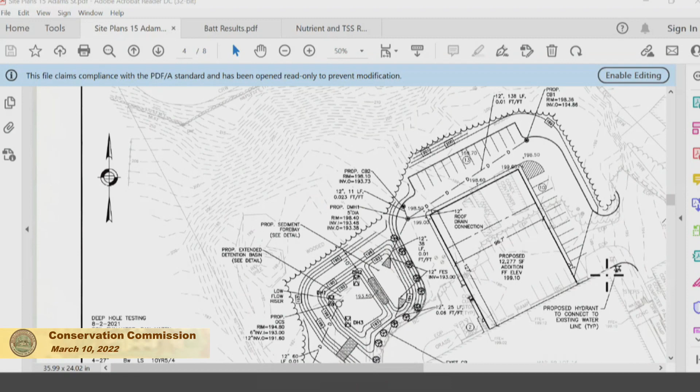Thank you. Okay, so why don't you folks make your introductory presentation on what the project is? And then you might want to comment on what conditions or what changes you had to make as a result of the Board of Health. That might be helpful. Okay?

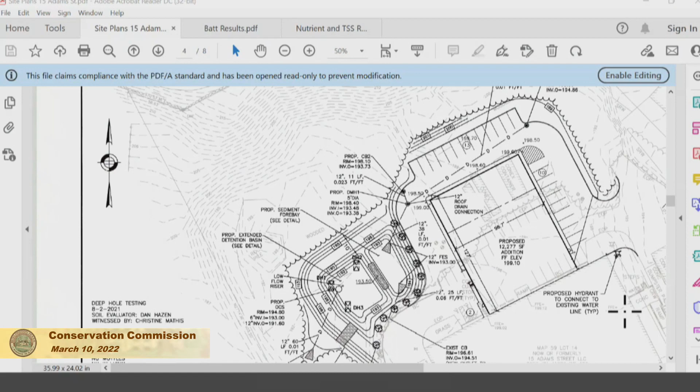All right, my name's Dan Hazen. I'm with Howard Stein Hudson Associates, civil engineers. The building was built in 1963. The site is about six and a half acres. The building itself is 40,000 square feet. Currently, there's 62 parking spaces. The site has water and sewer and utilities to it. Overall, there's approximately 75,000 square feet of impervious area in parking on top of the 40,000 square feet.

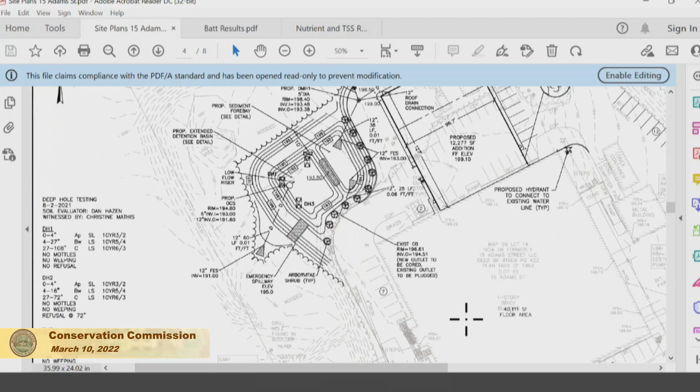Currently, there's no stormwater controls on the site. There are catch basins and curb cuts to direct the water just off the parking area onto the uplands, but due to the age of the site, there's no best management practices in place other than the catch basins. There is a wetland about 250 feet to the south off the property. It's a wooded wetland. There's not much standing water. I believe you did a site walk out there. It probably is some standing water at this time, just due to spring thaw and frozen conditions.

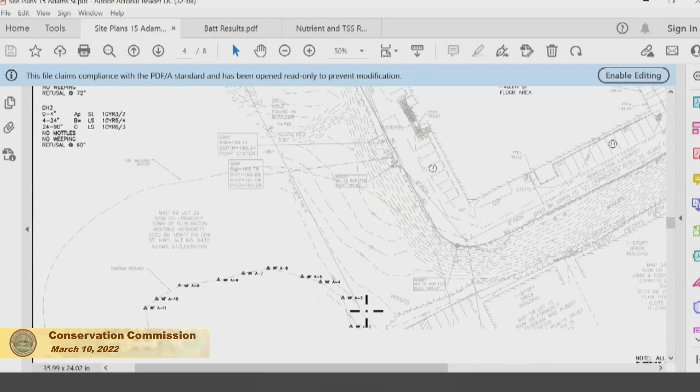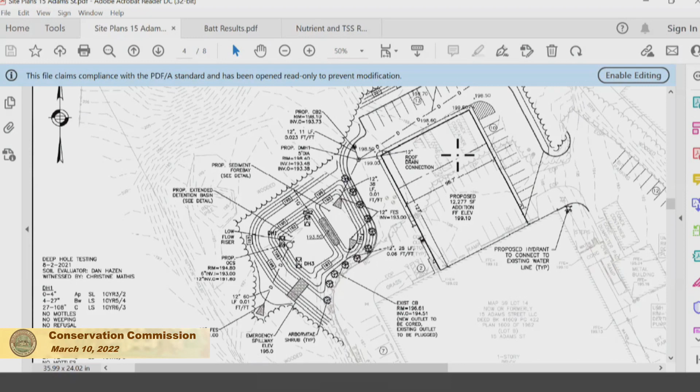We're proposing to construct a 12,277 square foot addition in the back, right there. That will be all warehouse. Currently, there are some Connex boxes on the site to store air filters. That is their primary product. They receive filters and then they ship them out from there. So there's not really any production there. It's more of a distribution situation.

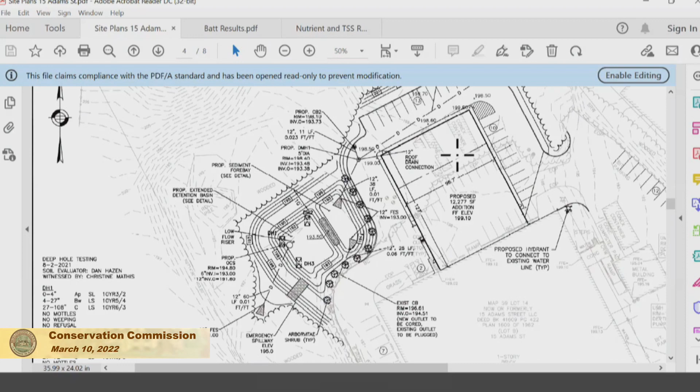Construction will be constructing an additional 1,300 square feet of impervious area. We're here before you tonight because we will be disturbing about 46,000 square feet of area. Of that, 34,500 square feet would be woods, and the other 11,000 square feet would be pavement that we'll be ripping up and then replacing with either building or new pavement.

The soils on the site are fairly gravelly soil. It's a Canton fine sandy loam and urban land mix. We did do soil testing out there through the Board of Health. They did witness it. We did not observe any groundwater. And again, it was a fairly gravelly sandy loam. The closest disturbance to any wetland is about 230 feet, and that would be the edge of the basin.

Stormwater controls that we're looking to install would be deep sump hooded catch basins. Two of those, and we're also going to be incorporating an existing catch basin just to the west of your cursor that just discharges overland. Those 3 catch basins will flow to a sediment forebay, and then from there to an infiltration area on the other side of that filter berm. From there, it would discharge through an outlet control structure for some of the larger storms and flow down to the wetland in the same path that currently the water travels.

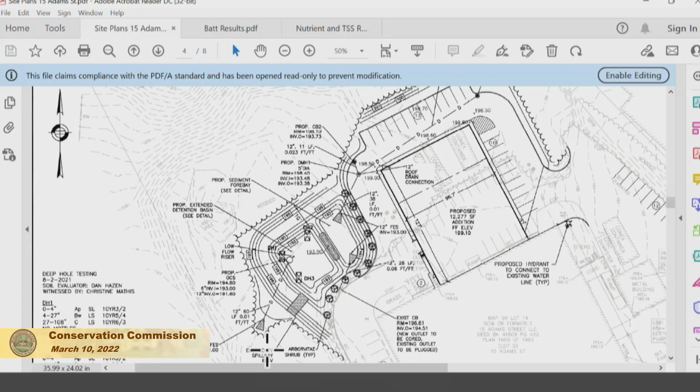So can you maybe go through the numbers that you sent us for the BATT? Oh, for the BATT, yes. BATT - that's the BMP accounting and tracking tool. That was the software that we use.

So basically what we do is we take the square footage of impervious area and upland area, and then determining by the use, input that into the software, and then that calculates how much phosphorus and nitrogen reduction we get through that based on the land use, the impervious area, the upland area.

So as far as, are we confident? Yes. So does the shorter retention time affect that? Because that's a very, very high number, that phosphorus efficiency, 99.8%, which is fantastic if that's right. It's with the new numbers, with the new hours, I mean.

That's the first flush when that rain comes - that's where primarily most of the pollutants come out. And like I said, during most of the storms, to get the 2-year storm we designed for is 3 inches of rain, so that's a fairly significant amount of rain. The 100-year storm, I believe, is up to 9 inches now, using the Cornell method with the extreme rainfall from the global warming that we're receiving, and the more intense storms that we're getting.

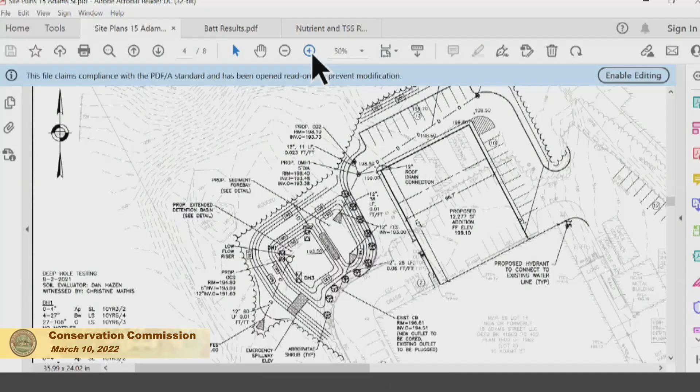So how much above the bottom of the basin is that then, like 5 feet? The bottom of the basin, we're actually building the berm up so the bottom of the basin's almost at grade. I believe it might be only a foot or two down off that, I can't say for certain. But we're not really excavating into the ground, so there's a good 4 feet of material below the bottom of the infiltration basin to the ledge.

Then it'll hit ledge, do you know where it'll go when it hits the bedrock? Not knowing where the bedrock is, we're assuming it's going to be at the same depth. This area, I believe, was excavated at one point because there wasn't a lot of topsoil. Didn't they take out all the topsoil because of the contamination?

Is that what I heard them saying in the Board of Health? I believe so. Of course, without knowing the contours of the bedrock, you can't really say definitively where the water's gonna go if it gets down that far. It's either gonna spread out or follow the slope of the bedrock, right?

Correct. And there's a number of large boulders out there as well, so we're not certain that it's ledge. I don't know if you noticed that when you did your site visit, but there's a number of large boulders. It may not be ledge either, is what you're saying. That's the point I'm making. There's a massive, just underneath where it says proposed extended detention basin, a large pile of boulders in that area.

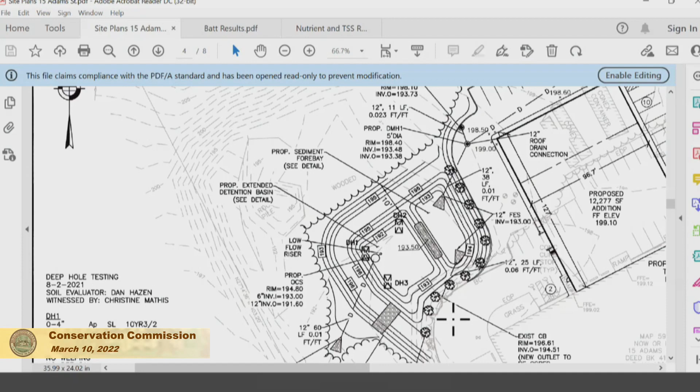Okay, just one editorial comment. The original design was an infiltration basin designed to drain within 72 hours, much less than the life cycle of any mosquito species we have here. Well, it was actually going to drain in 28 hours. Right, so the original design would not have been any sort of public health threat at all with regards to mosquitoes. Okay, just a comment. Can I make another editorial thing too?

Just on your nutrient, on the phosphorus removal treatment train, I don't think you can count the deep sump catch basins before the infiltration basin, because for the EPA curves, you're only supposed to count one thing, based on just the infiltration basin. The deep sump only gave us about 2%, so rather than being 98%, it would have been up to 100. It's a small number, but we can update that when I send you the actual backup information.

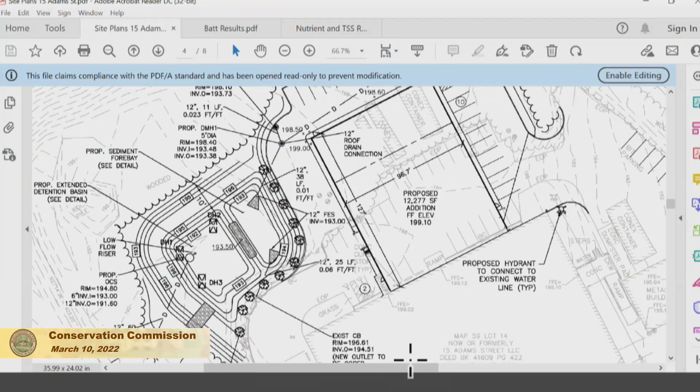Okay, anything else, Sean? Thank you. All right, so let's start with Gail. Gail, you have any comments? Yeah, I have a few questions from looking over the plan, let me organize myself here. Some of these were answered already, so hopefully my notes are clear from what I've read.

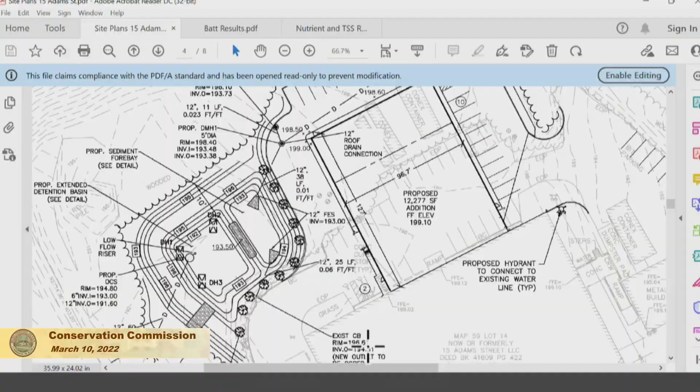Could you explain 1S and 2S? You talked about 1S flowing to the wetland, right? Let me grab this report. What's this from, Gail? This was in the description, it had to do with the catch basins, identified as 1S and 2S. Those are the subcatchments that the HydroCAD report produces.

So you talked about 1S going to the wetlands at Adams Street, right? The outflow, correct. 1S is basically the drainage area to the north and west of the site, and 2S is the pavement and existing building that flows down to Adams Street. So 2S goes out to the street? Correct. Basically all the construction is going to occur in 1S. Yes, I understand.

So you're saying all the new construction and disturbance is going to be handled by 1S, none flowing towards 2S? 2S is the portion of the site that is not going to be disturbed by construction, or a very minor amount. I understand, but none of the new construction feeds towards that direction? Correct. That's why we drew the dividing line there.

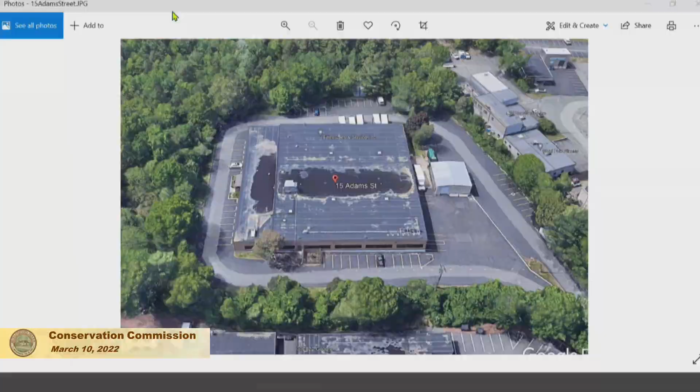Did I hear that you are adding only 1,300 square feet of impervious area? Sorry, I didn't understand. I'm sorry, I said the impervious area, how much are you adding? Is that 1,300 square feet only? 13,000. Or 13,000? Well, it's slightly less than 13,000. The addition itself is 12,277 square feet. But a good portion of the addition plus the existing parking area is on existing parking. So we're putting a building on top of pavement, or we're excavating pavement to put a building in a good portion of it.

And the roof runoff, what are you doing there, can you show me? The roof runoff will be piped to the basin. That was incorporated in the drainage analysis, that the roof runoff would go into the basin to be infiltrated. Directly, right? Correct. Directly? Yes. It's clean. It should be clean water, it wouldn't have a chance to get any contaminants in it. No, I understand that, yes.

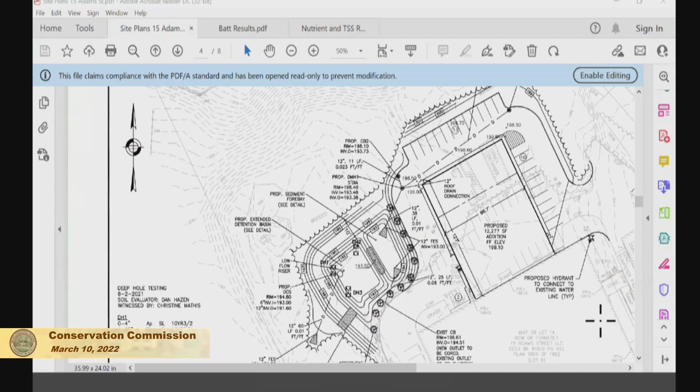And the same thing about the trees, losing trees is also my concern. And if you could consider the solar panel, what Gail was mentioning, that would be really good. I think this is a much better place or opportunity to place the solar panel. So I would tell you to consider that. Okay.

Ed? After listening to all my other commissioners, I can't see anything else I have in question, so I'm fine. Thank you, Ed. How about Bill? Couple of items.

In terms of the tree cutting, I'm not going to duplicate what everybody else has said, but you did mention that your basin is somewhat oversized for the calculations that you had done. It's designed for the 100-year storm. The reason I'm mentioning that is that one of the factors that is never really calculated into stormwater plans is how much water those trees are currently taking out of the ground and will not be doing in the future. So that'll be an additional load to the stormwater treatment when those trees are not there. So if it's oversized, that would allow some room for error from the lack of trees in the future. Correct.

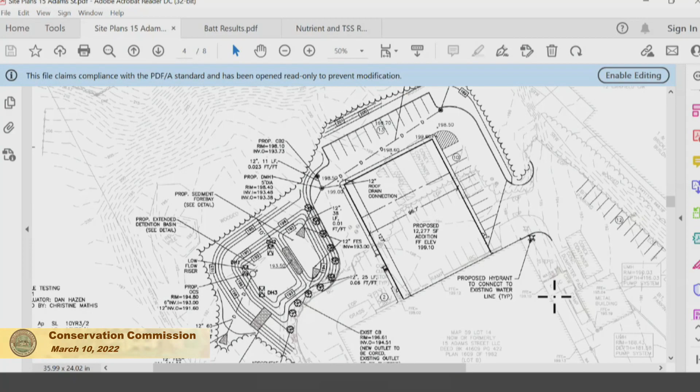The existing catch basin shown in the plan there, that is being replaced? Yes, that is being replaced with a deep sump and a hood to get the TSS removal. The existing building's roof runoff, I'm assuming that just flows onto the pavement somewhere? I'm wondering, is any of it likely to be captured in this new improvement on the existing catch basin? Do you know where it comes off the building? No. Okay, I'm just curious, because if that was the case, some of that might end up in the treatment there as well. Okay, that's all I have, thank you.

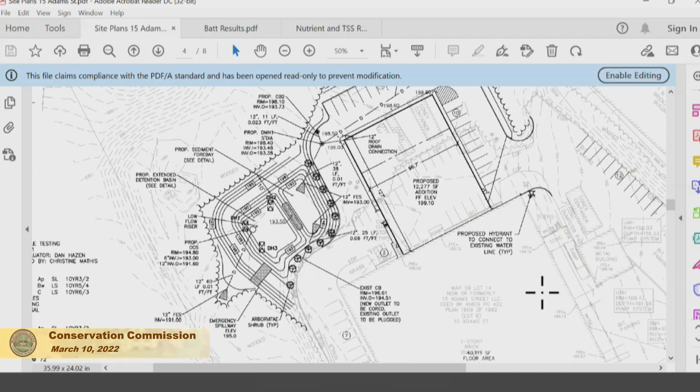Okay, I guess I'm last. I have a couple of things. Could you explain the forebay? I understood what you said about infiltrating the first half inch and so forth. So if there is a rush of water, the forebay is going to have the pollutants in the bottom. Is it going to stir them up and then overflow the berm and discharge? Somewhat, maybe? Somewhat, yeah. It's fair to say.

The whole point of the train is that the catch basins take out the sands, the heavy solids and the trash. The forebay would take out the medium size, and then the infiltration basin. And that's kind of the point of making sure that there's regular maintenance. I mean, right, that essentially is the honest answer. If you get a real rush of water, some of it's going to resuspend. Correct. And so, given that answer, the reason why I led with that is because I have a question.

Would the plan be compromised if you took the roof water and sort of spread it out, if you had less water, or you had a way of handling the roof water during a major storm so that when it overflows, you just discharge it to the back? Would that upset the runoff calculations? Because that way you would maintain a lower flow through that forebay basin. Or alternatively, and you don't have to have the answer now. If this is something you could look at, you could say that too.

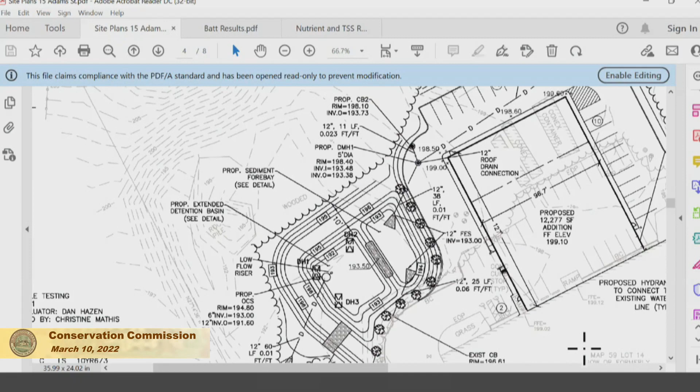But what I'm asking is, would you take the roof runoff from the addition and go not into the forebay, but the after bay? I don't know what it's called. Yeah, I was just about to say that, because it is clean water and essentially it doesn't need that extra treatment in the forebay, and you'd have less risk of resuspending the solids and shoving them out, and I don't think it would cost your client very much to do that. Yeah, I don't see that as a problem. Does that sound, in your judgment, reasonable? I'm not trying to design it for you. No, it definitely sounds reasonable.

Would that affect the phosphorus? The area is already calculated in. Doesn't affect the phosphorus. The rooftop should be fairly clean. No, I'm not saying the rooftop is dirty. I'm saying the calculations. The basin is where the phosphorus reduction is taking place, and if you're flushing more clean water in there, my earlier point of it getting stirred up and overflowing. But isn't the phosphorus in the forebay with the first flush? A good portion of the phosphorus should be in the forebay, but any additional would go into the other basin, but it's still substantially less. It's all under the same storm, the same IDF curve is what I'm getting at.

Is the phosphorus suspended or dissolved typically? It's typically dissolved. So holding it in the forebay is not going to make it go away until it infiltrates. Correct. But there will be infiltration in the forebay. Yes, there will be some there, and then the rest will take place in the other basin. Okay. I think it'd be a better system because where most of the pollutants are, there's less chance of resuspending in a higher storm. Yeah, and it's already calculated for that area. That would be great. So could you two take a look at that? Yeah, we can definitely take a look at that. Okay, thank you.

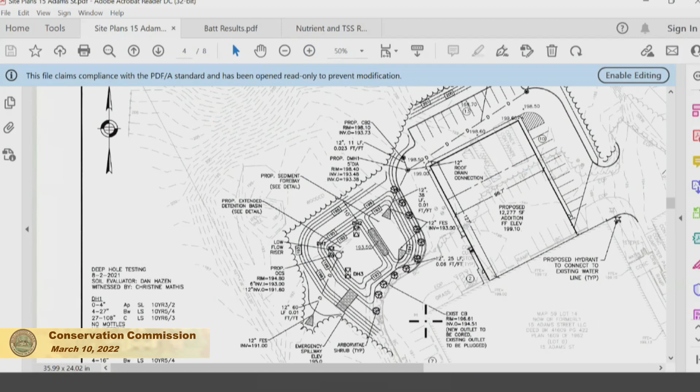So with that as the preface, without too much added cost, the way the contours are, do you see on your plan on the right-hand side, the number 12? I don't know if you can see it up there. I can see it on my plan because I have paper in front of me. Sorry, I'll zoom in. If you want, you can come look at this. Looking, Larry? Yeah, I'm looking right here. Okay.

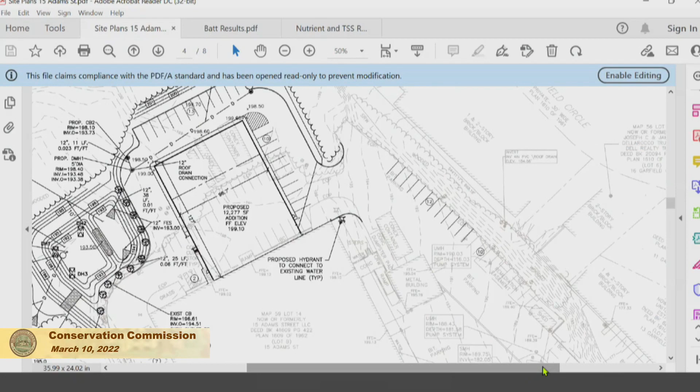The way the contours go, it would perhaps not be terribly expensive to capture some additional stormwater, since it heads right to the edge there anyway. You could possibly put a catch basin and catch some additional stormwater. There'd be additional cost, obviously, because you're not planning to do that, but maybe without an outrageous amount of cost. I was wondering if you could take a look at that, because any additional stormwater sheet flowing off into our stormwater system is not good.

So we're not increasing the existing flow. I know, we're capturing all the additional. Oh, I know that, I understand that. What I'm wondering is if it's possible you could run it by your client and ask them, because it's a contribution to managing stormwater, which is one of the biggest pollution problems in the country now.

It just seems like, and I'm not even suggesting that you're required to do that. I understand. Okay, so the way the contours are going, it seems like you could capture that whole little right side and put a catch basin in there possibly. Now, I don't know if the elevations would support it. That's the other thing.

Well, if we were able to put an infiltration catch basin in there, you're familiar with those, right? Basically it's a self-contained structure that goes down, and it will capture the water and filter it underground. That's a possibility. This is more of an ask. I understand. It would be an additional cost to the project. But if we had to pipe it over, I have a feeling the elevations don't support it.

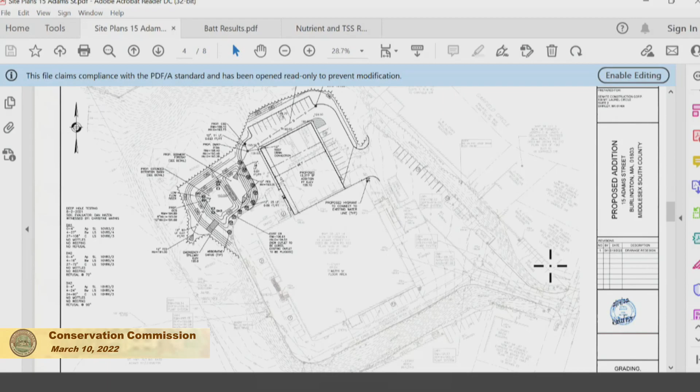And it looks to me like there's a building just to the northeast there, right there. That's below grade, right? That would be below us. Yes. And by infiltrating in that area, this building was built in 1963, so we're talking 60 years ago. You're concerned it might just break out on the slope? Either out of the slope, or I would hate to have them come back and say they're having water issues or mold inside there. I certainly understand. So that's just the first thing.

All I'm asking is, you may have good reasons why it doesn't work, and I get it, but maybe you could just take a quick look and see if it's feasible. Sure. Like Bob said, we could possibly do something like a beehive basin, where it would capture some of the runoff during smaller storms, but they're not sized to handle a larger 10, 25, 50-year storm.

It would be a contribution to what we try to do environmentally here with our stormwater permitting system. Right, it would lighten the load downstream a little bit. If you could take a look at it, it would be very much appreciated, please. Sure.

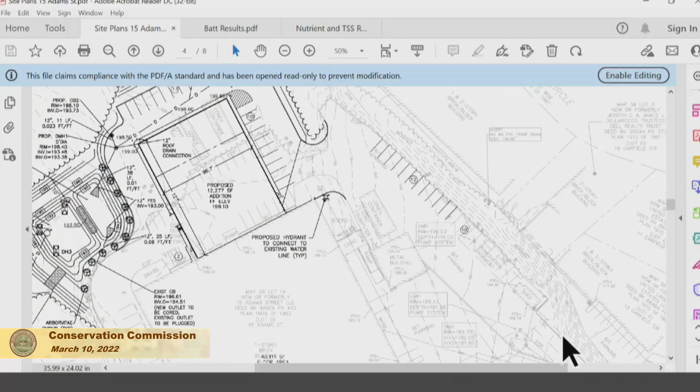Can I ask a related question? On the other side of the property, in the lower left corner of the paved driveway, there's a couple of items in the gray called inverts, right near circle number 7. To the left? Lower left of the building, the driveway that goes around. Yeah, down in there. There's a little triangle of property that says invert.

Is that where water is currently flowing off the pavement? It just goes out there? I believe so. That would already be going down the slope towards the wetland. Correct. And below that on the corner, there's another invert. I think that might be a sewer. Okay, so some of the water on the existing pavement is already going towards the wetland and not flowing out to the street. Correct. All right, good.

Now, I have one more thing, and again, this is an ask, not a requirement of the bylaw at the present time. There's been a lot of talk about trees. Why don't we formalize that it might be useful to consider planting some trees back there and watering them the first year. I don't know if it would be a terribly large expense. Eileen and John, would that be a worthy ask to see if they might be willing to do that?

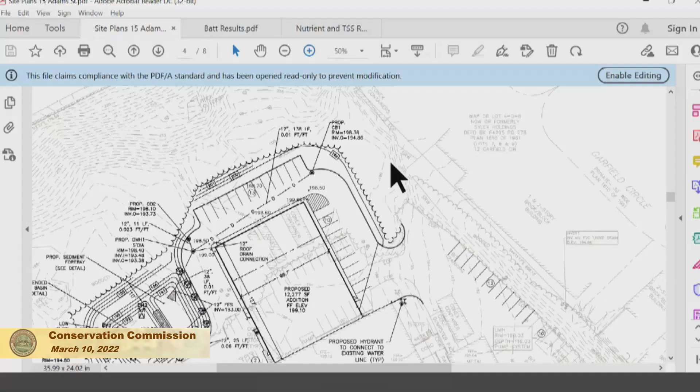Well, so I have one. So you're actually clearing and grading like 30 feet to the north beyond the parking lot? So what's the purpose of that? Why are you clearing and grading? That would just be for snow storage in that area. Because when the plows go in, they can push directly up north and then they can push off to the side. And it's in an upland area that would allow for, I mean, we wouldn't want to destroy any trees that you would plant there, obviously, so it'd have to be far enough back. I mean, if that was the area you were thinking of, that obviously wouldn't work.

So where else could you? I don't know, I was just gonna ask them as just a good faith ask, if they would just take a look at it. Because trees, you're not gonna get a mature oak tree if you plant something, but what are the typical plantings, 1-inch diameter type of thing? Yeah, so those are really sandy soils there, so they would have to be watered very frequently, and you'd want fairly tough, drought resistant, like maybe pitch pine or white oak or something like that. Something that can really handle dry, sandy soils.

I mean, trees have such an environmental benefit for many reasons. I won't have to go in and lecture everybody on that. A lot of people know this now. And it's not required by the bylaw. Right. Okay? Yep. But it's kind of an ask. Okay. See if you might consider it. Could we just see if something makes sense in back there? Okay. Okay.

What are you proposing? I know the Board of Health asked for some screening trees or something. Are you putting arborvitaes or something else there? Is that what that's going to be? Well, frankly, we were going to use some of the boulders because their concern was safety more than anything else. And so we've gotten some feedback from the planning board where they've asked for a guardrail. And we've got a big pile of boulders there; they're going to stop cars from driving over the edge really well. And frankly, it'll be a little more appealing than a guardrail made out of wood, okay? Right. In our opinion. So that was our intent, because we think the arborvitae is going to get trashed just from where they're located. Right. All right, that's all I have.

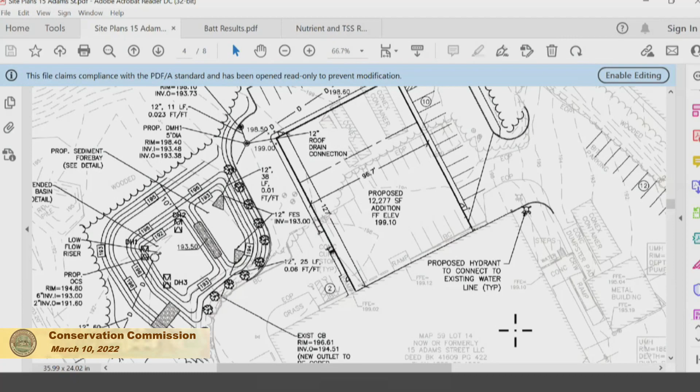So is there anyone in the audience, either online or in-house, that has any questions or comments for the project at 15 Adams Street, Burlington? Okay, the record should show there is no one else participating. So I have a list of 6 things. Could I just quickly run through it to make sure we're all on the same page?

Yes. So we're going to send the parameters to Eileen for computing percent removal for the program. Right, the areas that we put into the software. All right, and you're going to update the percent removals for not counting the deep sump catch basin, which will change a percent or two. Right. Okay, and you're gonna remove the fertilizer and pest control references in the O and M plan, because it's not really needed. And you're gonna take a look at the roof runoff to go into the second bay. I don't know if there's an official name for it. I call it the second bay. Okay.

And you're going to take a look at potentially some type of mini infiltration basin right around the 192 contour, because it just directs the water from that section right at that. Okay, and then the last thing is trees, which we've had more conversation about than anything else. Yes. So two things. One, there's a hand up. Yes. But before you call on the hand, can I just make one request?

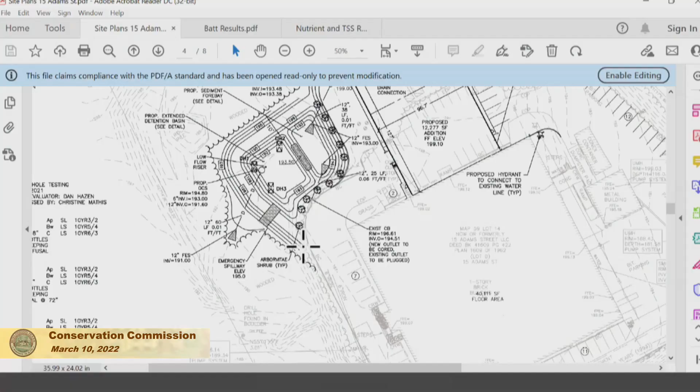What are we doing here? Okay. Oh, he's just looking at the plan. He just wants to delineate the location of the basin. I just want to understand what point he's talking about. So the closest of the grading. So yeah, right around there. Okay, yeah, sure. Thanks. So you want the outside of the grading point? Yeah. Okay, all right. Just the closest work to the wetlands, I think is what you're looking for.

Okay, yep. All right, so I think I saw Brenda Rappaport. She's chair of the planning board, I believe. Brenda, would you like to say a few words, please? Yes, thank you. I just wanted to note, the folks are talking about a guardrail. We weren't necessarily looking for a guardrail. What we're looking for is more trees, more greenage, just for separation, not a guardrail, but just for the record. That's all. Okay. Thank you.

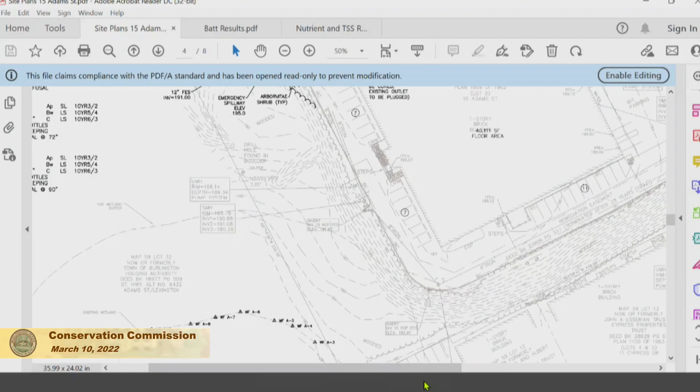Okay, anyone else that's online? It's hard to see the screen, like seeing a hand up, but I'll try. Anyone else who wants to make a comment on this? Okay, so

Eileen, is it reasonable to assume that we might be able to issue the permit at the March 24th meeting? I think it probably is, based on what we've heard. So you have a few things to look at, but I didn't see any major showstoppers here. And we'll get that out for you at that time, after we go through the 6 items that we had on the list. And you have a planning board meeting next week, you said? Yes, we're meeting on the 17th with the planning board. So will we send them some comments about our concerns? Okay, sounds good. I don't need a motion since they're agreeing to it in person. You need a motion, you need to vote to continue. Do we need to vote to continue? Yeah.

Okay, all right. Could I have a motion to continue the hearing for the erosion sedimentation control permit for the project located at 15 Adams Street until the March 24th meeting of the Burlington Conservation Commission? Is there a motion? So moved, Bill. Second? Second, Gail. Dawn, how do you vote? Yes. Gail? Yes. Indra? Yes. Bill? Yes. Ed? Yes. And the chair votes yes, by a vote of 6-0-0. The 15 Adams Street hearing is continued to the March 24th meeting.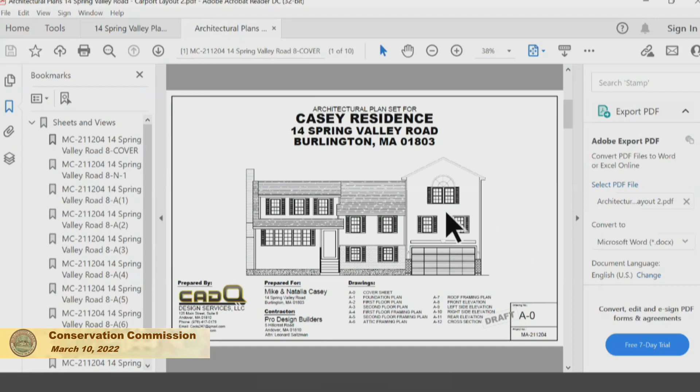Sure. So I don't know if the commission got a chance to look at all the revised drawings and plans. But basically, what you have is a garage addition. There's like two floors above it. So it's not a garage. It's actually a residential addition with garage. Okay. There you go. So the garage level, the addition will be built on piers, essentially 4 piers with open sides on 3 sides. The 4th side is obviously up against the house.

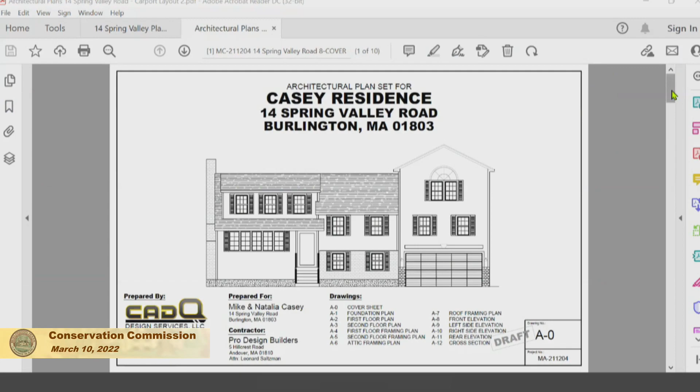So I think it looks okay. It looks like something that might be approvable. I would recommend that the applicant run it by the building department.

I did send a copy of it to the building department and got some reply that I didn't completely understand. So I would suggest that you talk to the inspector of buildings and make sure. Sometimes architects draw something that looks good, but it doesn't always work. So I just want to make sure we don't go through this, close the hearing, approve it, and then find out you need to make something wider or a complete change.

And also, I know you've had some difficulties with DEP, some confusion about the submittals. It'd be good if, within the next couple of weeks before the next hearing hopefully, Merrill -  who you were dealing with - will have a chance.

Once again, we don't want to close the hearing and approve something and then get a comment from DEP that it doesn't meet their standards. How do you get them to kind of pre-approve it that it looks pretty good? Well, I'll try to call her or email her. You'll talk to them? Yeah.

Okay, you've been responsive, but on the second revision - or the first revision - that we sent in, I didn't think to put the DEP number with it. So they've been assuming it's a completely separate project, even separate residence, and didn't attach the two. So we cleared that up.

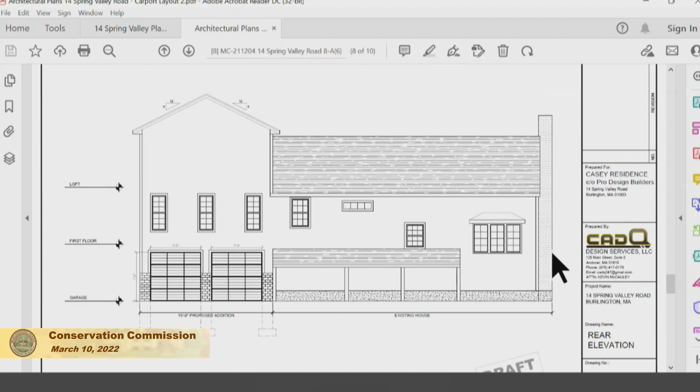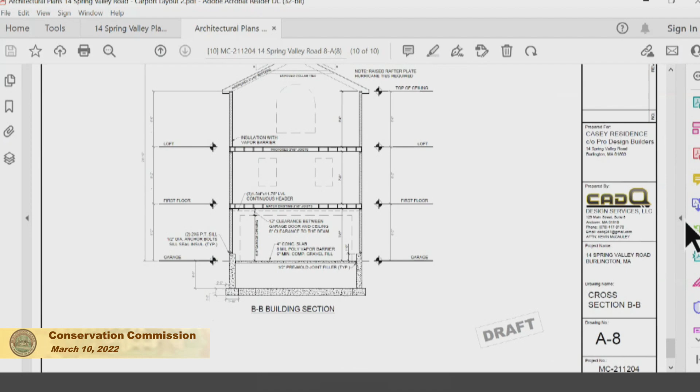And the architect has - I don't know what page it is. On the plan here, and I weren't sure what it meant. Say again? I said he said something about number 8 that, well, I don't think either John or I understood. Yeah, tell me which page to go to. Previous page, I don't know the exact page. Okay.

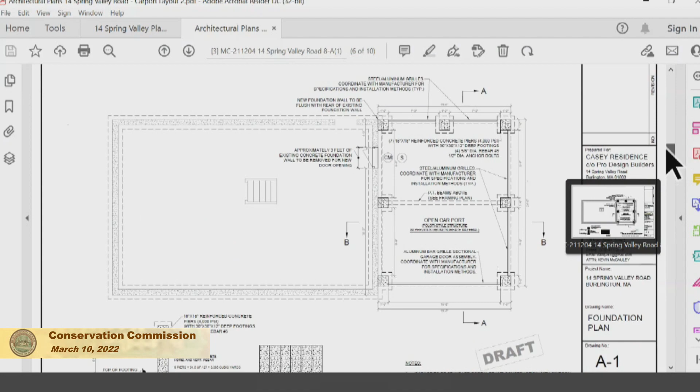One more. You want further up? Yeah, it's got some drawings on the architectural plan, because it's got like the pier - actually it might be, if you scroll down a little bit, it's on this page on the bottom. One of them shows how the piers are constructed, actually.

Essentially there's two concepts: one's like a steel I-beam that's inside of the pier, the other one's rebar constructed. And then the third idea is combined, and it's all architecturally - he said you can do either of them. There's different costs associated, but essentially it won't sink or sag or do anything. You know, that's what the architect says.

But essentially what we're doing is we're putting a room above it, moving my daughter's room, making another family room, and then trying to have a loft for storage, because the way that our houses are built in the neighborhood, there's literally no storage or very, very minimal. So somewhere to put Christmas lights and such would be really nice.

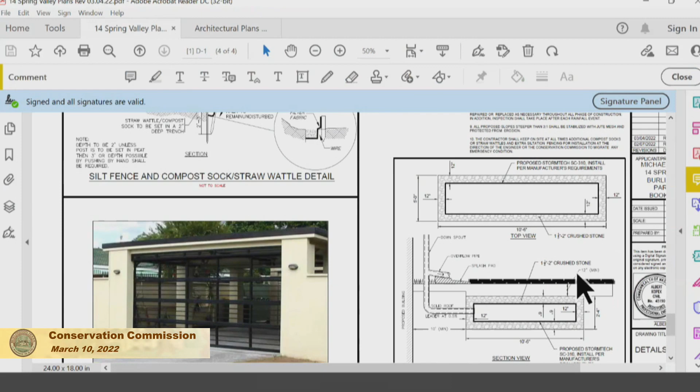I mean, this is essentially the way all houses will be built in the floodplain, you know. It's basically the only way you can really do it. This is only an addition, but a new house in the floodplain, certainly you see it on the coast all the time. Have you seen things like this in the past? I haven't seen additions like this, no, but certainly houses, yeah. So it should be feasible. Oh yeah, definitely should be.

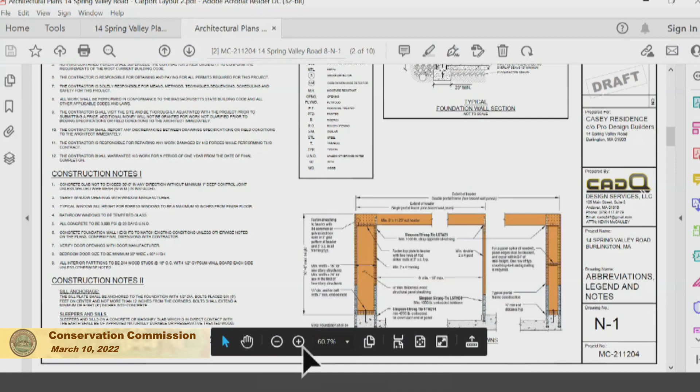Oh yeah, absolutely. Okay, alright, Eileen found the part I was referencing where it's essentially a steel I-beam and then there's beams across it. But this is uncommon in the Northeast, not uncommon in warm weather climates. You know, they have the center of houses, or garages, or even the entire first floor in some areas like this that's really open, and then only on the second or third floor would it be enclosed.

So this isn't reinventing the architectural design, it's just obviously not common in the area.

Okay, let's see if there's any comments. John or Eileen, any further comment, or you're all set? Dawn, anything further? No, nothing further. Gail? I just want to support that you do see homes like this in the mid-Atlantic and New Jersey, along the coast, Barrier Islands and so forth, not just for floodplains, but coastal areas for floods from hurricane damage and stuff like that. They're being built like this. All right, Kent, anything?

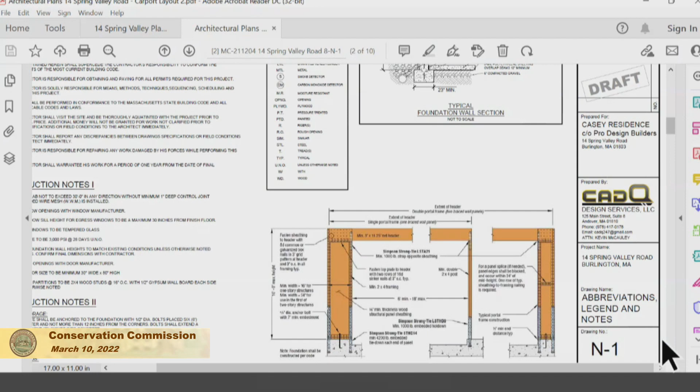Nope, nothing to add. Indra? Nothing further. Bill? Just one question about the rooftop runoff. You have it going to a small infiltration chamber. Do we have confidence that that will work in a floodplain like this? Is there clearance for it to infiltrate? Yes. And how do you know that?

The engineer that now is deployed in Washington, he does this not only for civilians like myself, but for the military. And he did the calculations and put it in the notice of intent, the explanation for not only will it compensate the addition, but it'll also be able to capture the front right of my house that currently isn't in any sort of infiltration system.

Yep. Although the back, right, and left, I did it myself, but I piped into the ground, put essentially a French drain so that we're able to disperse instead of having to run on the top of the soil. But my concern was whether this chamber has got sufficient clearance to groundwater underneath it.

Absolutely. Did you do a test pit or something, or determine where the groundwater was? In the back, I have a pool, and we had to replace the liner. Pool's about 8 feet deep, and the 7.5 feet is where the flood water was. So we have that capacity between that's slightly lower than the front of the house. So you've seen the capacity and a glimpse of where it is. Yeah, I was like, well, that's not good.

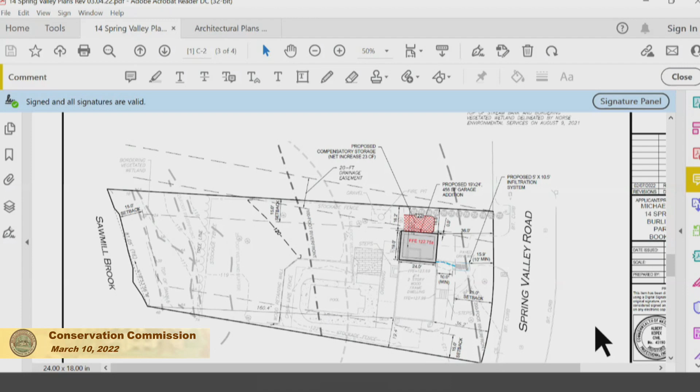Okay, and Ed? Just looking at something I've seen before. My brother lives right on the ocean lines of the Gulf in Florida. Got exactly that same kind of design that he's added on. Okay, no comments. Does it look nice? Yeah, for what he's doing, it's impressive, because he's also getting a tax break too, because he's in a floodplain.

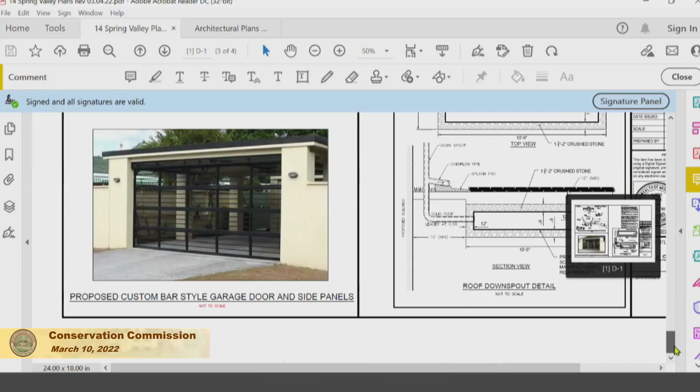All right, just curious, is this, the bars and stuff made of stainless steel? Is that what you're going with? So the metal fabricators that I've been talking with, because nobody has this just in stock, it's not in Home Depot or Lowe's or anything, my goal in talking to them is that it'll hold up to a soccer ball, because my kids and the neighborhood kids are always around my house, so it likely will be built out of aluminum.

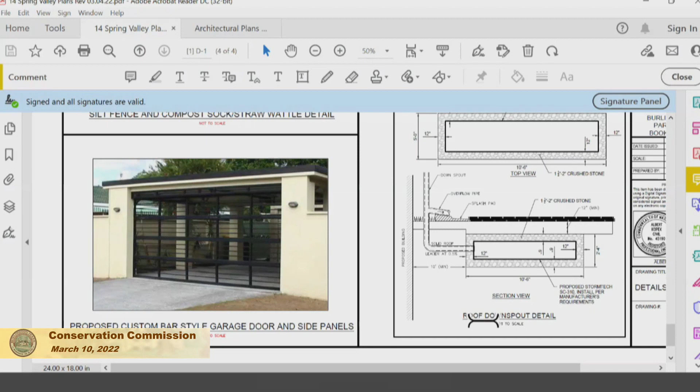And then there's a number of different coating systems that you can have for corrosion, and powder coating is likely the best. And then we're just talking about the depth and weight of the system so that it won't affect concrete, because we're not hanging it, it's not going to be suspended in the air. It's sitting on the ground and then attached to the pillars, so it won't have any risk of falling over. And they've all pointed me in the direction of aluminum so far, but I haven't bought the product or made them build it yet. Essentially, I'm leaving it up to the experts.

Powder coated aluminum will probably give you 30 years before it's showing wear or something like that. And if you had to, you could paint it anyway. They have specialty paint called aluminum boat paint made exactly for that, that will adhere. It takes tons of coats, but it will last forever if you have to do it. But the fabricator, years from now, you may. Absolutely, who knows. The fabricators there say they actually paint it in-house, so they have a number of different application systems, and we'll give you something reasonable that'll hold up really well.

Right, exactly. Okay, is there anyone in the audience for 14 Spring Valley Road that has any comment?

All right, then could I have a motion to continue the public hearing for 14 Spring Valley Road to the March 24th meeting? Is there a motion to that effect? So moved. Moved, Don. Okay. All right, Don, how do you vote? Yes. Gail? Yes. Indra? Yes. Yes. Ed? Yes. And chair votes yes, by a vote of six to zero. 14 Spring Valley Road hearing is continued to March 24th. Thank you.

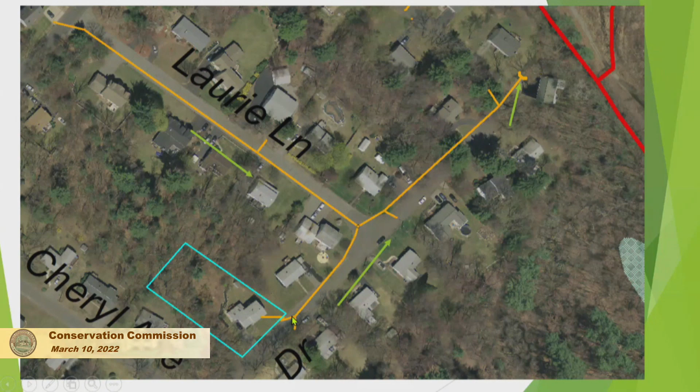So when this house is torn down and a bigger house is put in its place, if the stormwater hits the storm drain system, this person here gets more water in their yard.

This is another example of another spot in town. The red line is Sandy Brook, and again these green arrows show that in general, the stormwater is trending this way.

It's either going to the wetlands or directly into the river. Everything from Maud Graham Circle goes directly into the river. And this area in the Greens Oval is a spot where, in the last several years, there's just been a lot of flooding. I'm not suggesting that the flooding is all due to increased impervious stormwater. It isn't. But it's one of the things that is exacerbating issues for people in that area.

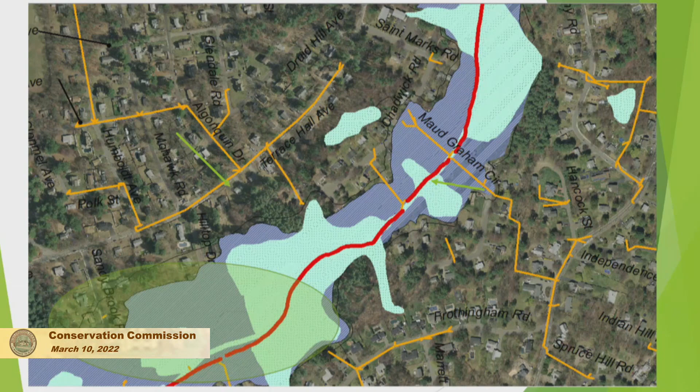So I just wanted to show people the visual of what the storm system looks like and how it's directly affecting people. The first slide you showed was terrific because it shows that it affects a house that's not even necessarily an abutter to the property. That's 10 houses away. That's 600 feet away. Yep. And that's typical. The water from your property goes into the storm drain system, goes around the corner to somebody else's house. And most people think if it's in the storm drain, it's gone. It's fixed. Right. It's not.